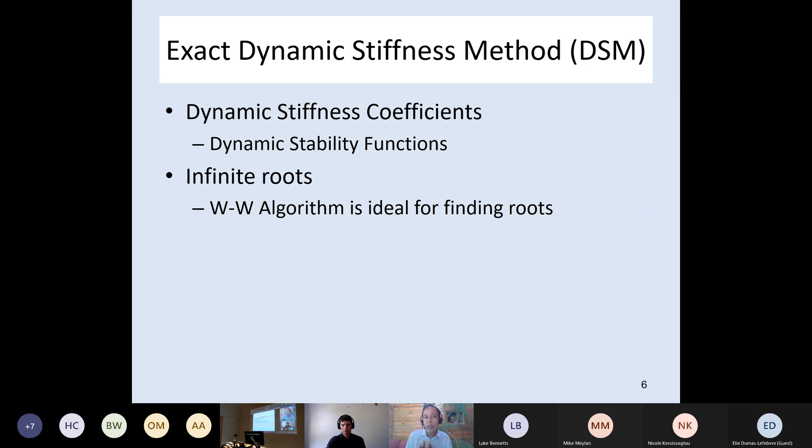Now the algorithm is named after the two co-inventors, Wittrick and Williams. Both have sadly passed away. Professor Williams, who was at Cardiff, and I have worked together on 2 projects, and we have co-published papers. And he was one of the co-inventors of this algorithm, which nicely enables the calculation of the roots of the frequency equation.

Is everybody able to hear me?

Okay, good. So let's look at the application of the dynamic stiffness method, which I denote as DSM. If you consider the vibration of a very simple frame, an A-frame which is pinned at the base, the first vibration mode would look like what I have sketched there. In fact, you can show that these will be 2 half-sine waves. So they are pinned at the base and rigidly connected at the apex at the top, and this is how the first vibration mode would look.

So the way the dynamic stiffness matrix works is you express the forces or moments. In this case, because the frame cannot sway, we are not interested in the force, so we have a moment equation. The moment coming from the first member on the left plus the moment coming from the second member, K1 S1'' theta 1 plus K2 S2'' theta 1. Sorry for using these symbols. These double primes indicate that these are stiffness coefficients which are modified to take into account the fact that one end of the beam is actually pinned. If it wasn't pinned at the base, we would not have a double prime there. It's just an accepted symbol.

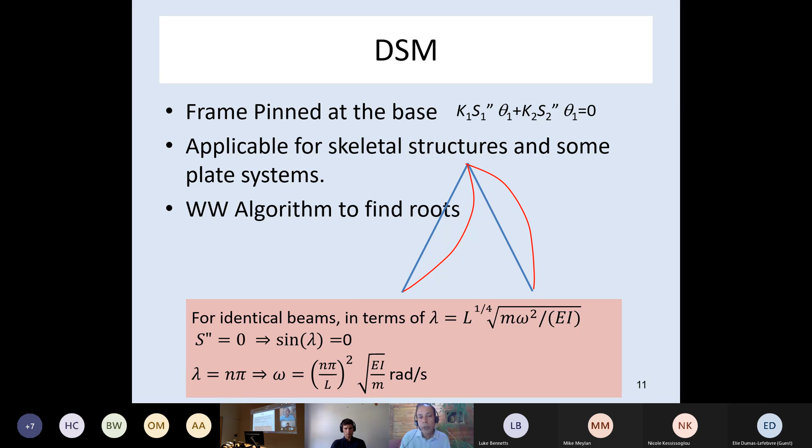Okay, so it's applicable for skeletal structures and also some plate systems. And you can use the WW algorithm, as I said, to find roots. So as I said earlier, one can argue about the accuracy of evaluating pi, but the solution does not require further changes to the method itself, and the frequencies can be calculated simply using that frequency equation: sine lambda is equal to 0, or whatever the transcendental determinantal equation is. So the method in this case is exact.

Unfortunately, exact solution is not always possible. So let's look at what I regard as the second best for continuous systems. Here you see a plate which is simply supported along two edges. The dotted lines show simple support and the other two edges are free. So it's a simply supported free plate, which I denote as SSFF plate. Edge 1 and edge 2 are free, but the other two are simply supported. And there is no exact solution to this problem.

To have an exact solution, the Levy type, you need to have at least two opposite sides simply supported, or what they call gliding, which means shear free at both ends, but the slope is constrained. So those are the two possible conditions that would enable you to get the natural frequencies and modes exactly.

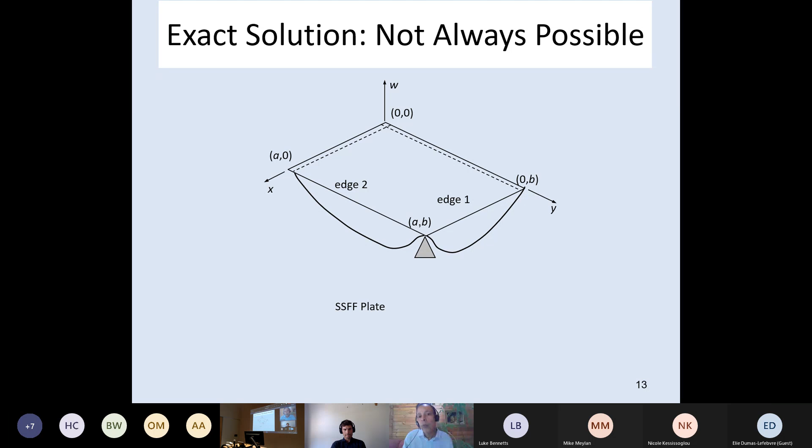So in this case, there is a nice method called Gorman superposition method. The person who developed this method, Professor Danny Gorman, sadly passed away a few years ago, and we used to meet at a number of conferences, and he nicely explained this method. The first time I learned this method was at a conference when he explained it, and I actually liked it. Okay, so how does it work?

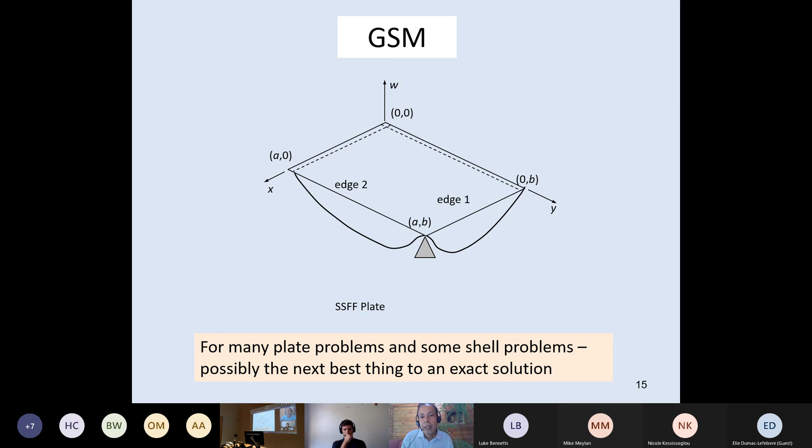The idea is you find the solution to the actual problem by composing the solution from, in this case, two building blocks, but there can be more than two building blocks in some cases. Building block 1, up on the top right, has three simply supported edges; the dotted lines are the simply supported edges. So we have two opposite sides simply supported, which means we can find an exact solution to either the forced or free vibration problem.

Then the clever thing that Professor Gorman did was to find the forced vibration solution to the plate, building block 1, subjected to some edge loading along the free edge. It can be a force, or it can be a displacement. You can choose either. So you apply a distributed force there, and then you find the response. The forces will be harmonic forces at an unspecified, undetermined frequency omega.

So we are getting the solution, but assuming different modes in the x direction. With the simply supported edges, you can have 1/2 sine wave, 2/2 sine waves, 3, and so on. For a number of these sine waves, assuming that particular shape in the x direction, we then find the forced response. And likewise, we look at building block 2, where we now have two opposite edges simply supported parallel to the x-axis, and now the distributed force is applied along edge 2, whereas earlier it was applied along edge 1.

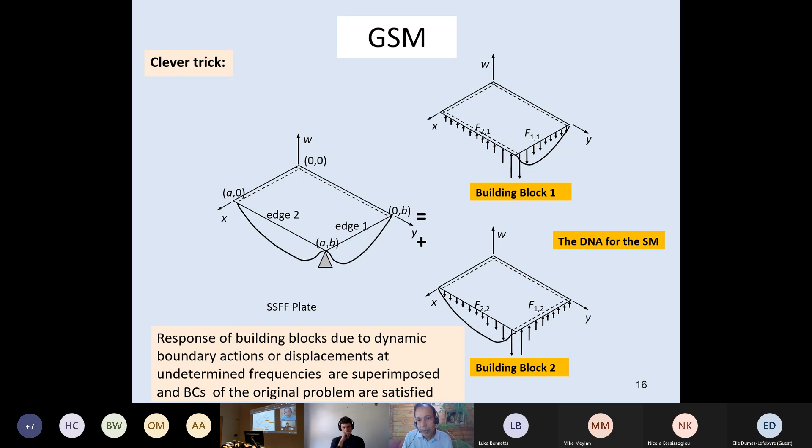From my experience, I found the Gorman superposition method converges a lot faster than the Rayleigh-Ritz method, because in the Rayleigh-Ritz method, you actually have to satisfy the equation of motion effectively when you minimize the so-called energy functional. What you effectively do is you satisfy the governing differential equation, and that seems to take longer because you have to work on the entire area, whereas for this method, you just have to work along the boundaries. Okay, so I think that is a clever trick, and that's why I like this one as the second best.

Okay, so as I said, you can use exact solutions. In some cases where an exact solution is not available for the building blocks, you can still use approximate solutions. And one of my former PhD students, currently a colleague at Waikato, Dr. Yusuke Mochida, his PhD thesis was based on developing the superposition solution using the approximate Rayleigh-Ritz method to find the modes of shells, which is not possible to find using the exact method. And then he used the superposition method.

So it's a combination of Rayleigh-Ritz and superposition, and that was a little bit faster than using the Rayleigh-Ritz method alone. And the reason for that is you first find the approximate solution for the building blocks as accurately as you want, and thereafter you deal with the boundary condition. So you tackle one problem at a time, and that may be the reason why it worked more efficiently, or the convergence appeared to be faster.

Okay, so yes, the boundary equations are formed with weighting functions in the form of modes of building blocks, which are often exact but not always. So you can use approximate solutions as well. Okay, so the number of equations we have is equal to the number of modes. And again, this solution is approximate because as you increase the number of terms in the series for the building block solutions, the accuracy is going to improve.

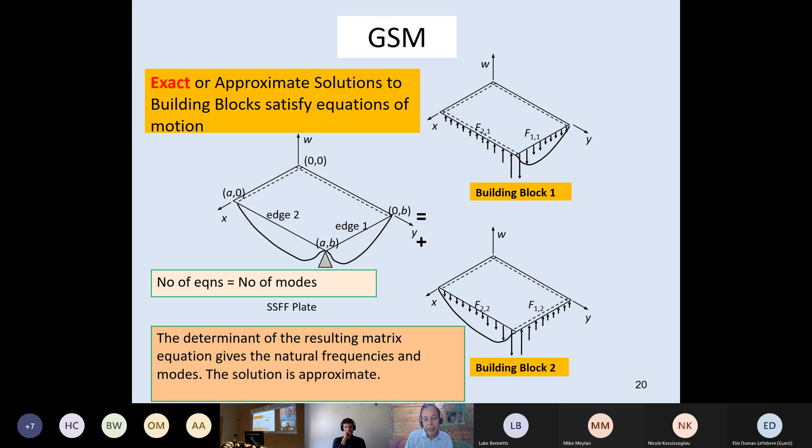And this is one of the areas where I have had disagreements with some colleagues on whether this can be called exact or approximate. The building block solutions, I agree, are exact, but the final solution, it's an excellent method, it converges very fast, it is still only approximate. Okay.

So for some of the problems, we can find the solution in a bounded way. So we will actually know whether the solution is an upper bound or lower bound. And that sometimes is quite useful, because if you find the upper bound using one method and lower bound using another method, you can bracket the solution as close to the solution as practically possible. And you can also estimate the maximum possible error. Okay, so time permitting, we will deal with the boundedness later.

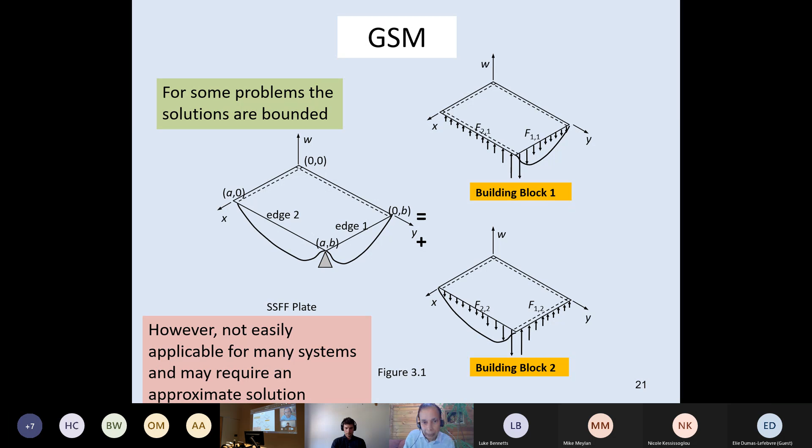Okay, so let's just compare the dynamic stiffness method and the Gorman superposition method before going into the next one, which is the Rayleigh-Ritz method. So the governing differential equations are already satisfied in both cases, and the frequency equation is a determinant of a boundary or continuity condition matrix. For DSM, the boundary conditions are exact, applicable for skeletal frames and some plates. Sorry, the second statement I mentioned, the frequency equation is a determinant of a boundary condition or continuity condition matrix, applies to both DSM and GSM. But for GSM, it is approximate.

Okay, so the boundary conditions are expressed as a series solution, and it's applicable for plates and shells and most likely some solids, but I haven't actually looked at those in detail, so I can't be 100% certain that it is true for solids. Okay, so DSM is exact, GSM is approximate, but it's very good because it only has to work along the boundary, not the entire domain of the continuous system.

So then we turn to the variational methods, and the most popular one I think is the Rayleigh-Ritz method. And there we minimize a functional which is really a ratio of the potential energy over a kinetic energy function without the frequency appearing in it. So in this method,

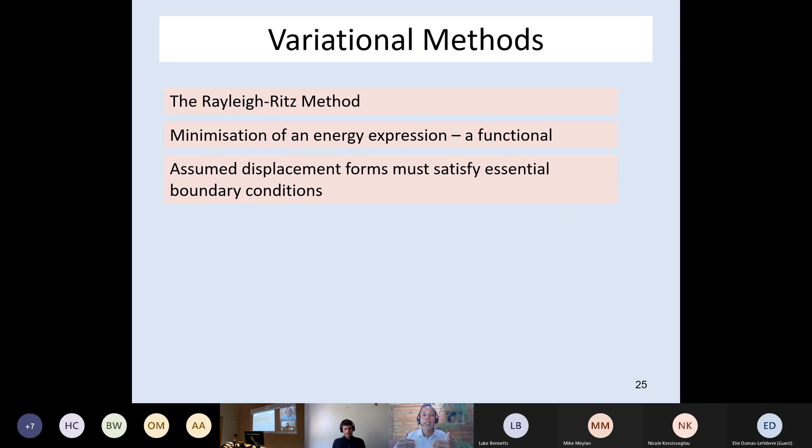It's a point sometimes missed by some researchers where they try to find functions which also satisfy the natural boundary conditions, but in trying to do that, they may be actually missing out on other functions which could converge faster, and therefore those solutions are not necessarily any more accurate than the solutions which do not necessarily satisfy the natural boundary conditions individually, but as a series they will be forced to satisfy through the minimization process approximately.

Galerkin's method is similar, but here you minimize the weighted residual error of governing partial differential equations, but also any residual forces on free boundaries. So the Rayleigh-Ritz method automatically forces the function to go to the lowest possible potential energy form where the edges are free, whereas in this case that is not happening.

So therefore you have to have an extra term to make sure that the residual forces along the edges or moments along the edges are also minimized. And here again, the assumed displacement forms must satisfy essential boundary conditions. For obvious reasons, I prefer the Rayleigh-Ritz method because one doesn't have to worry about natural boundary conditions.

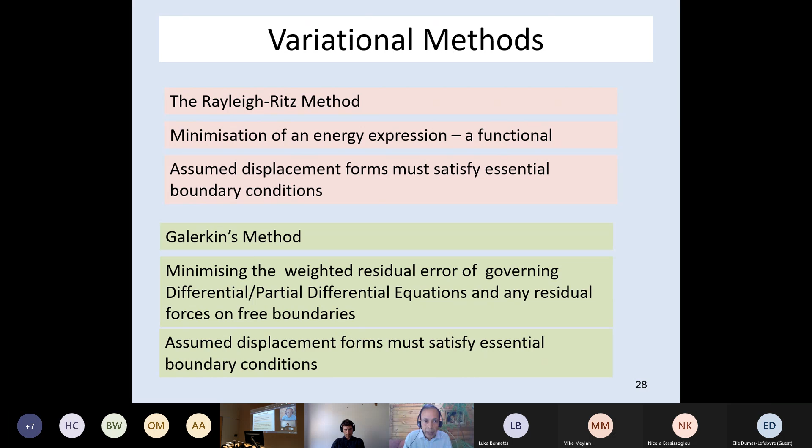So the boundary conditions can be enforced. The essential boundary conditions, the geometry conditions, can be enforced using approximate methods such as the Lagrangian multiplier method or the penalty method, and that's what I'm going to spend some time on next. Okay, so just to recap, the Rayleigh-Ritz method, the original form, requires each of the admissible functions to satisfy the essential condition, but we are going to bypass that requirement.

Okay, so let's just take a moment to look at the origin of the Rayleigh-Ritz method. Now there has been some debate over whether it should be called the Ritz method or the Rayleigh-Ritz method, and Professor Art Leissa and I have discussed this over many conferences, and we didn't come to an agreement on this. We agreed on the origins of it, but whether it should be named the Ritz method or the Rayleigh-Ritz method, unfortunately we could not agree on that. I believe it should be called the Rayleigh-Ritz method.

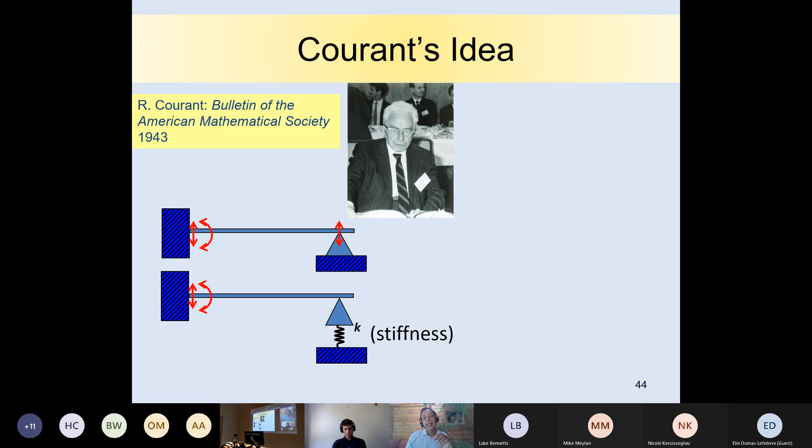Then you can put that into the solution, and then you need to put three different springs and enforce the boundary conditions. See what happens. With no spring at all, there are three frequencies. Put some spring stiffness there. They are going to increase, keep on increasing. You will see that these frequencies will get capped because you can never pass infinity. So the spring stiffness has to be lower than infinity. So they will asymptotically approach the constraint solution from below.

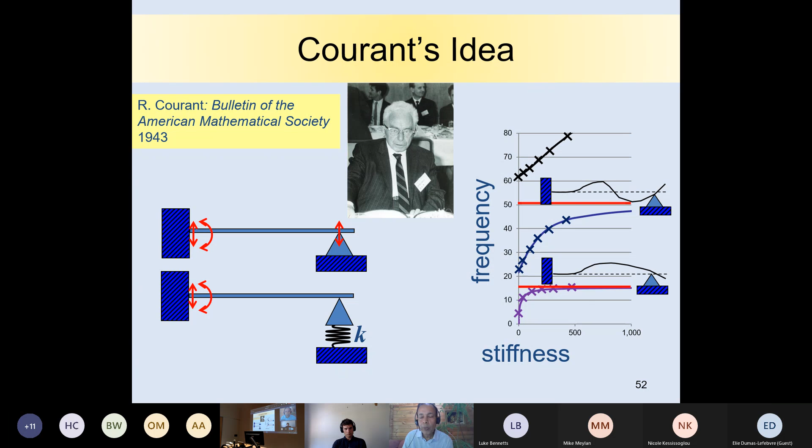Now there is a problem. Rayleigh-Ritz method gives an upper bound. Here we are looking at the upper bound of a lower bound model. So that problem needs to be addressed. It has been addressed now, but that was one of the criticisms. And the other criticism was, this was noted by Zienkiewicz back in '74, that one doesn't know how much error is there due to the violation of the constraint condition, this is called the penalty method, because although it is a stiff spring, there may still be some movement.

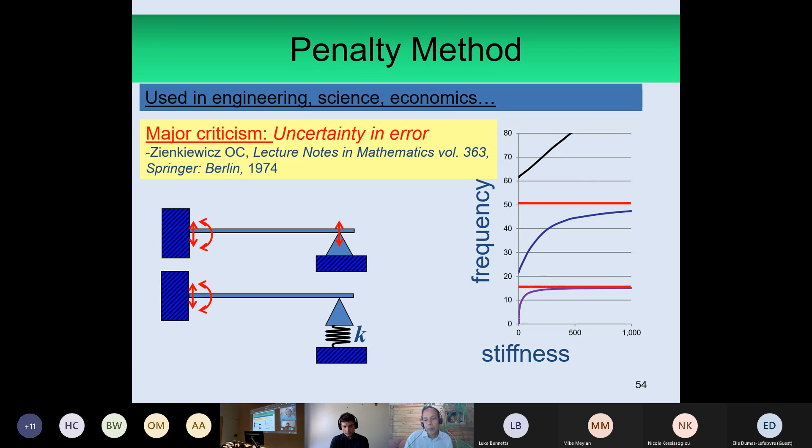So what's the solution? The solution that I came up with is to use negative stiffness and track the frequencies from both directions. When you use negative stiffness, you will find an upper bound, and the solution that lies between a model with a positive stiffness and a model with a negative stiffness will give you the right answer. So you can actually estimate the error if you choose one positive stiffness and one negative stiffness. One will be below the true frequency and the other one will be above.

And you can see, I don't know whether you can see the mouse. So you see at this end, can you see the mouse? The frequency is lower. Here the frequency is higher. So it must lie between there and there, so we can bracket it. Okay, so major criticism is resolved. And how did we get there? There's an interesting story, and I will try and tell you before I finish.

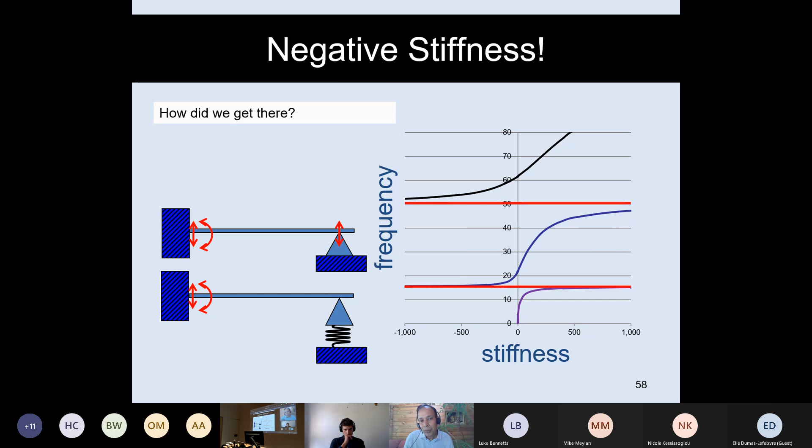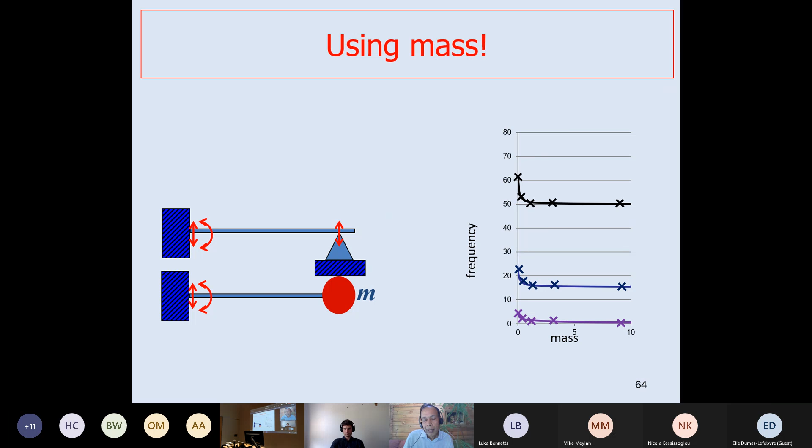So it all starts with using a mass. So let's see what happens when you use a mass. With a mass, increase in mass decreases the frequency, so you can asymptotically approach a constrained solution by also using mass. But this time you approach it from above. So using mass will give an upper bound solution to an upper bound model. It will be a true upper bound. And you can also use negative mass, and when you do that, you will get this. And what happened was I made a mistake in my PhD thesis where, in modeling a plate like this, I was looking at the post-buckled solution of a plate and the vibration in the post-buckled position.

And I wanted to allow for the movement of the loading head, the mass of the loading head. And I took that into account through an energy term. But instead of positive mass, I had effectively put in a negative mass. And it was a few years later, one of my final year undergraduate students spotted the mistake when he was trying to model a beam.

I told him to be careful with the free body diagram and make sure that the signs are correct. He followed my advice and he came back and told me my thesis had the wrong sign. And I thought it was just a careless typo, but I have to confess, I typed the thesis by looking at my Fortran program. So the problem was there originally in my Fortran program, and it worried me because we had excellent agreement between theory and experiment, and I also knew that the mass made a difference.

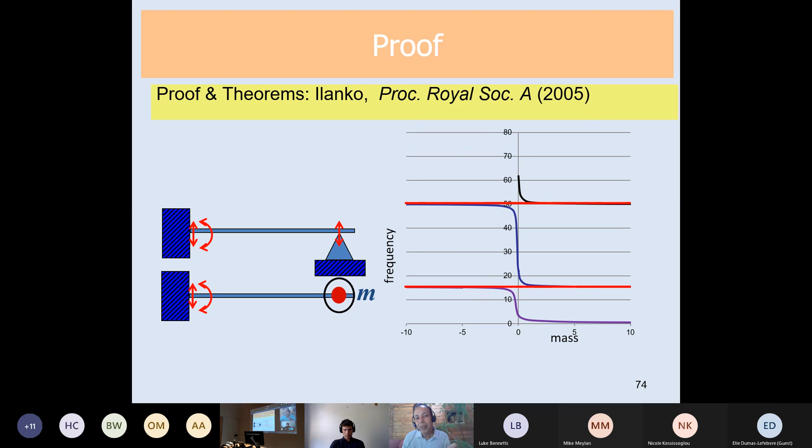And after sweating, I reran the program with the correct sign of mass. To my surprise, I got very similar results, and I was stunned. I didn't expect that, because I knew that the mass had an effect, and then I realized the mass was so high that it was practically constraining it. So that's how I discovered this, and it fortunately led to a number of papers, including a theorem on how you can use positive and negative mass to model these systems. So sometimes it's good to make mistakes.

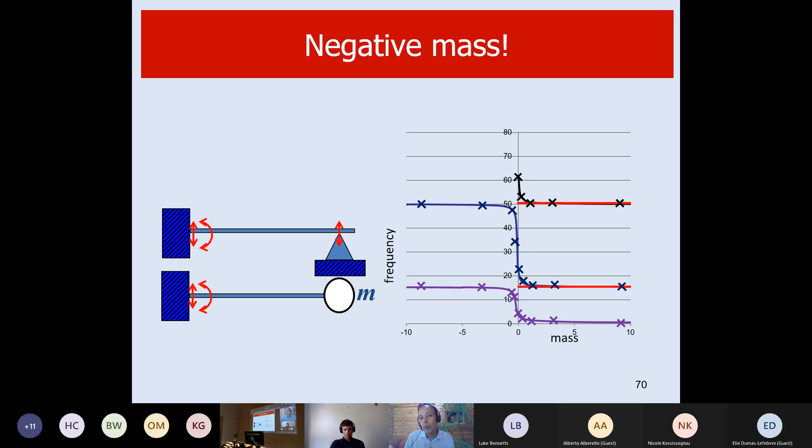And I just want to show you another thing about using mass versus using stiffness. With the mass, what you find is, so I should wind up soon, what you find is that the higher frequencies converge faster. Sorry, the higher modes, the frequencies of the higher modes converge faster. And that is because the restraining force, the constraint force, comes from m omega squared times displacement. So the higher the omega, the higher the restraining force. So if you use stiffness type penalty, while they may work well for lower modes, for higher modes, you may want to consider using mass, which works a lot better.

So I have to finish soon. I was going to touch on the boundedness, but because we are running out of time, I'll just mention the Lagrangian multiplier method can also be used to enforce constraints, and the Lagrangian multiplier method has actually been used to generate both upper bound and lower bound solutions to a plate problem, a buckling problem of a plate. That was in 1946 by Budiansky and Hu, in a NACA report, the previous version of NASA. This is freely available. Anybody interested, it's a very nice paper to read. So you can use the same formulation to get upper bound and lower bound solutions.

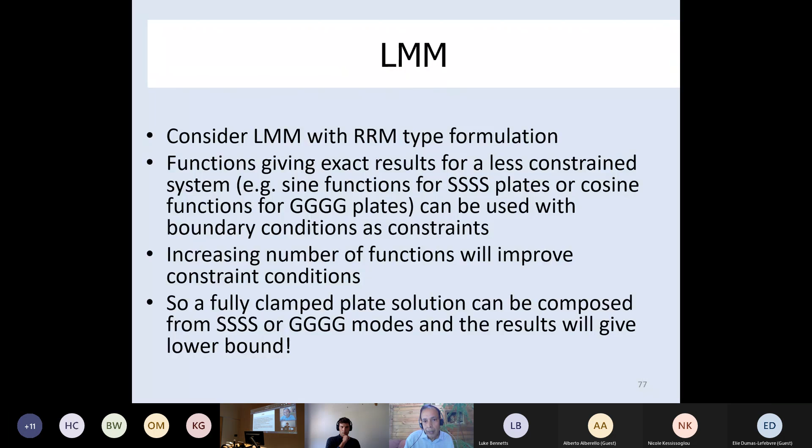And the way it works is if you consider functions giving exact results for a less constrained system, for example, using sine functions for simply supported plates or cosine functions for gliding plates, they can be used with boundary conditions as constraints. So you then start with those less constrained functions and you approach the higher constraint solution. And when you do that, you will get a lower bound. Okay, so there are some references at the end of this presentation, if you are interested in finding how to get the bounded solution. It is always nice to know when you have an upper bound solution what the lower bound is, if at all possible.

So briefly, these are the conclusions. DSM is exact, GMS is next best because you only need to worry about the boundary. Rayleigh's method is good and it's versatile, convenient, and you don't need to worry about the geometric conditions. You can use a penalty method, with negative stiffness and positive stiffness, or positive mass and negative mass, and you can then calculate the effect of the constraint violation and control that error by choosing the appropriate magnitude. And where available, bounded solutions will help to address the lack of exact solutions.

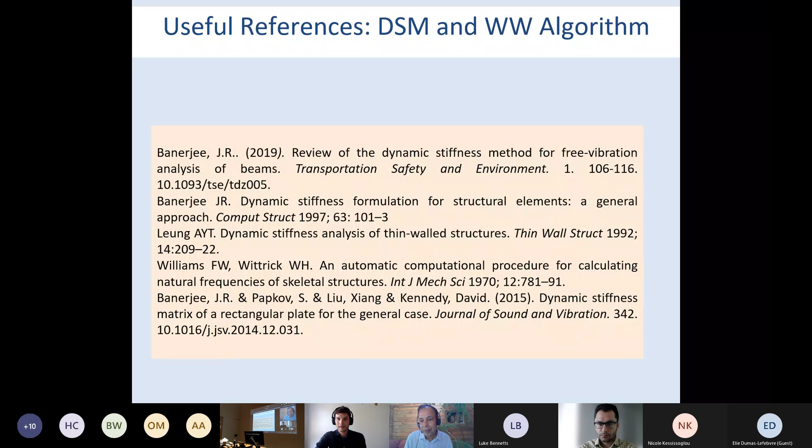Very interesting presentation. So actually it reminded me of some of the presentations that I